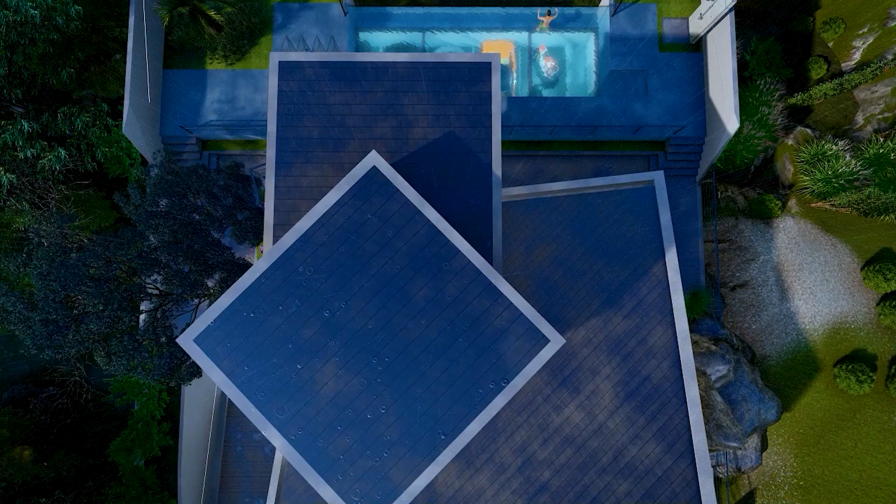Ako nga po pala si Aldrin Ortiz Marin, creative artist at isa po akong licensed architect na nakabase sa Kuwait, at active member ng United Architects of the Philippines Kuwait chapter. Shout out UAPKC at sa lahat ng mga arkitekto sa buong mundo. Mabuhay ang arkitektong Filipino. Let's get started.

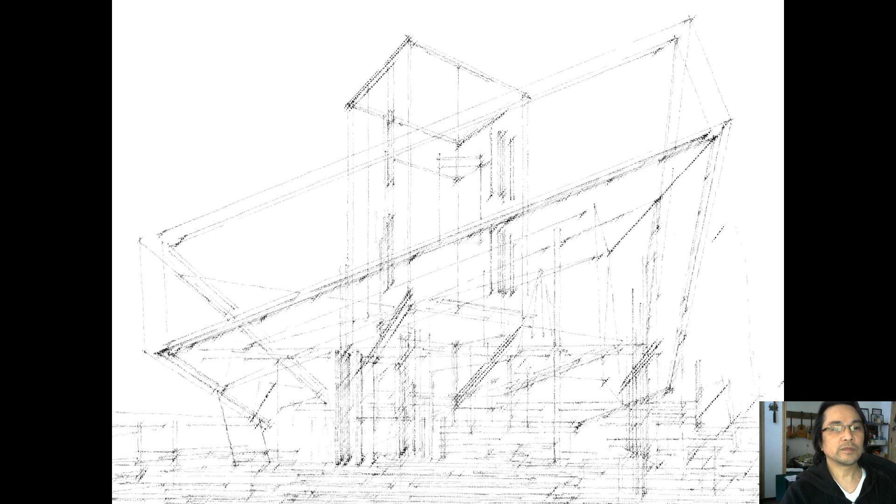Okay, so this presentation is for the design process of a contemporary house with car parking garage intended for the cars that you have seen on the earlier video. However, contemporary is an architectural style which is the upgraded version ng modern design architecture, whereas simplicity is there, but we are introducing an element that is more interesting and more striking.

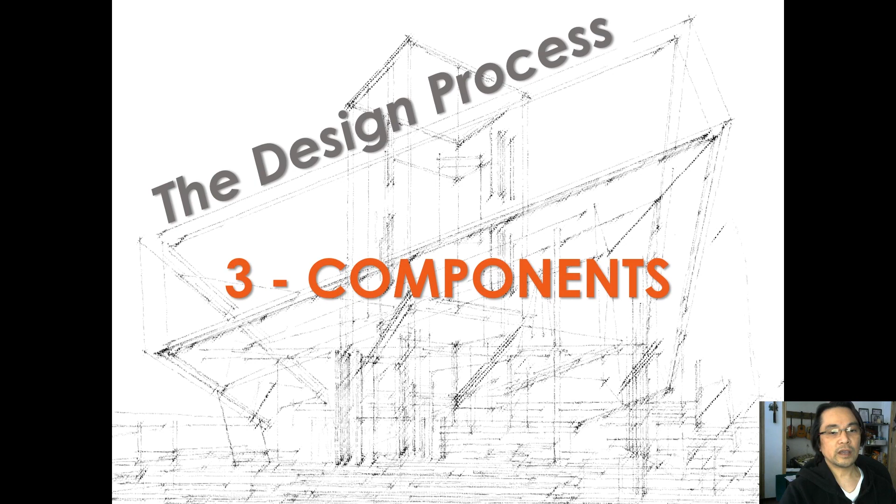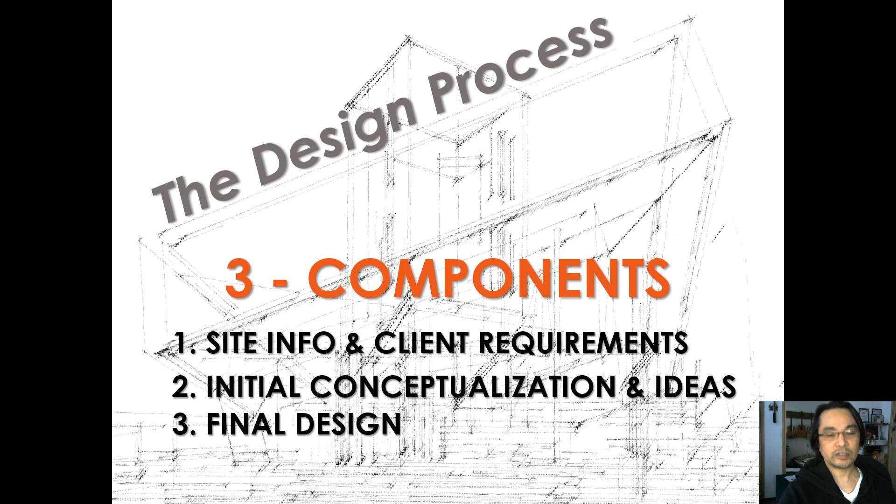So I have chosen 3 essential components to complete the design process. One is the site information and the client requirements. So once the architect gathered all this information, pwede na siyang mag-move on to the next step, which is the initial conceptualization and design ideas. So ang architect ay magpo-produce siya ng mga options, 3 options normally. Then once the client choose the right one, the gusto niyang design, so then the architect will gonna proceed on the final design process. Okay, so let's move on to the site information.

So this is the closer look of our site, and the area is 984 square meters, 24 by 41, and the road level here is 275 meters above sea level. Ang lot natin ay slightly sloping, and then on the upper part is sudden drop. May parang bangin dito. And then on the top side is may malaking bato.

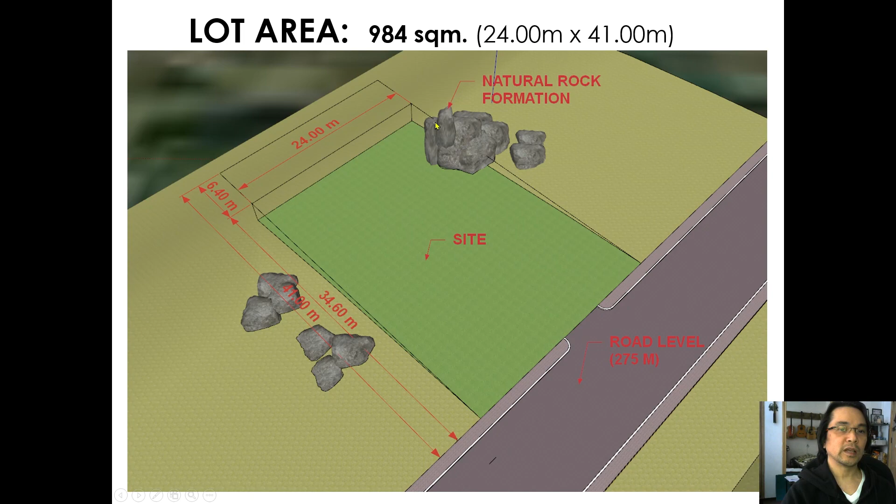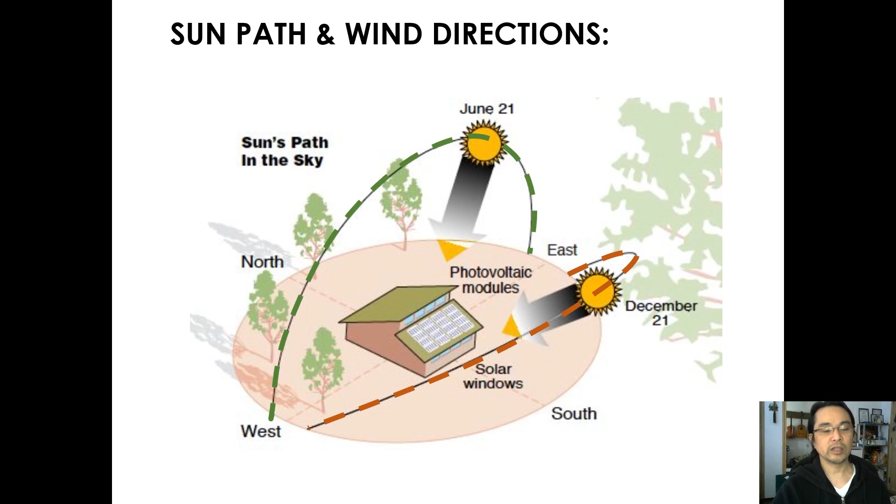Next is sun orientation and wind directions. The image below that has shaded part, ito yung sun angle variation between June to December. This sun path direction studies is really important in considering the sustainable design para ma-orient natin ang building at the same time ma-position natin yung mga rooms sa tamang lugar. Ma-maximize natin ang power ng sun to gain the maximum amount of energy kung gagamit tayo ng solar panels or solar roof tiles. Moving back to the sun path direction, and ito yung orientation ng ating lot.

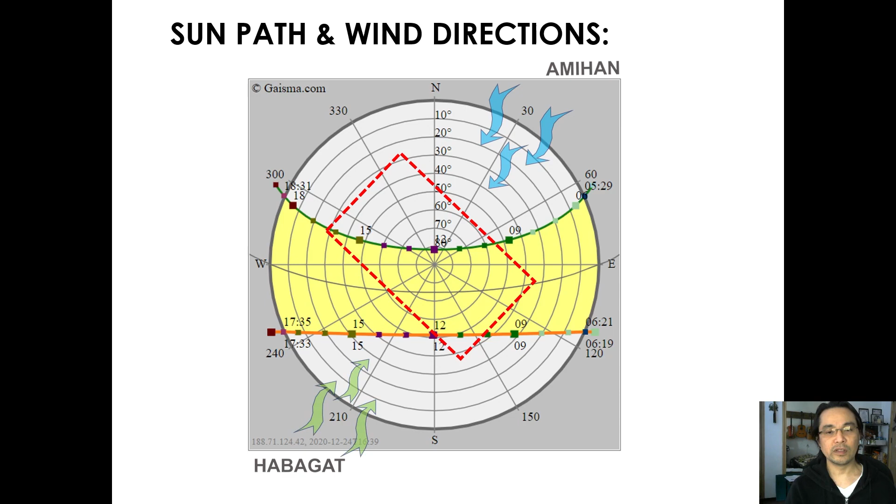Whereas on the top right here is the northeast wind, which is malamig, somewhere around in December. And then on the opposite side is this hanging habagat, which is on June, na medyo mainit at may humidity. Wind directions are really important to consider in the design process for us to have a nice natural ventilation within the building, or what they call cross ventilation.

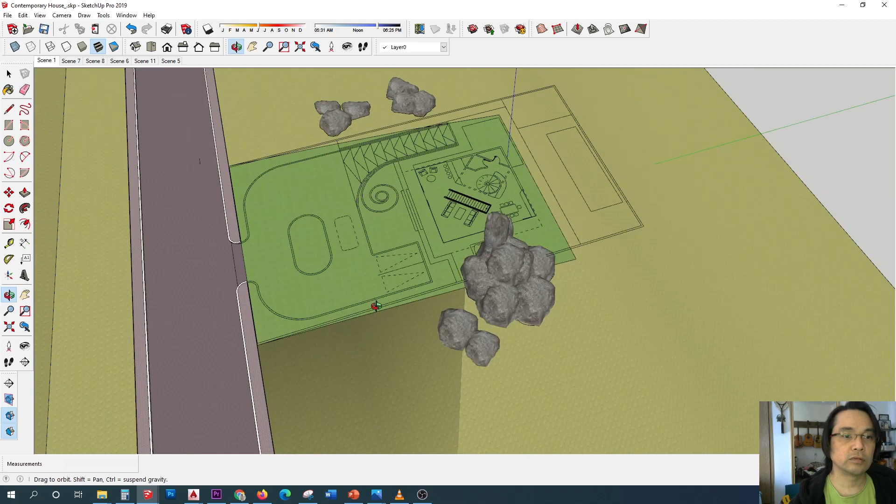SketchUp model. This end part, it is projecting, it's hanging on the air. Cantilever bali to. I'll just fast forward this while I'm doing the SketchUp model here.

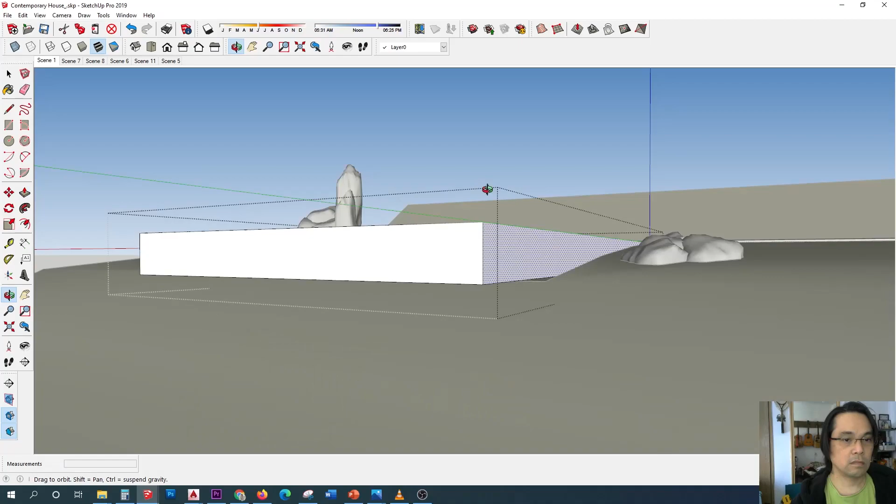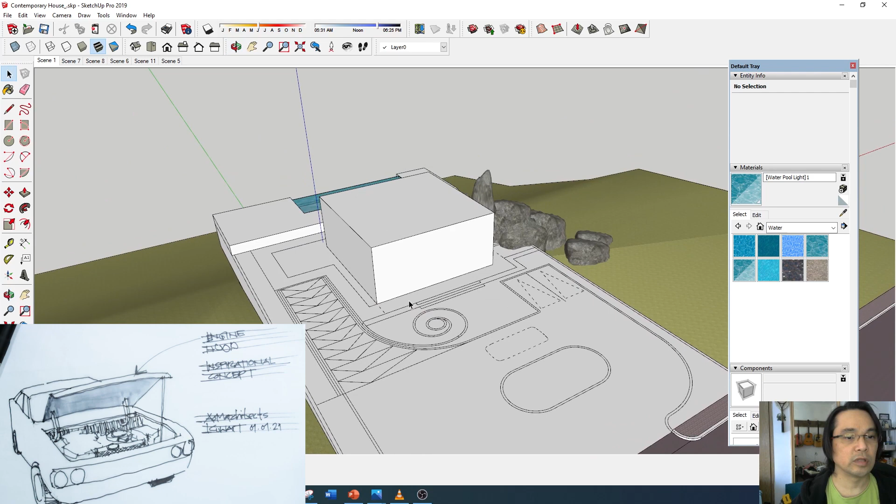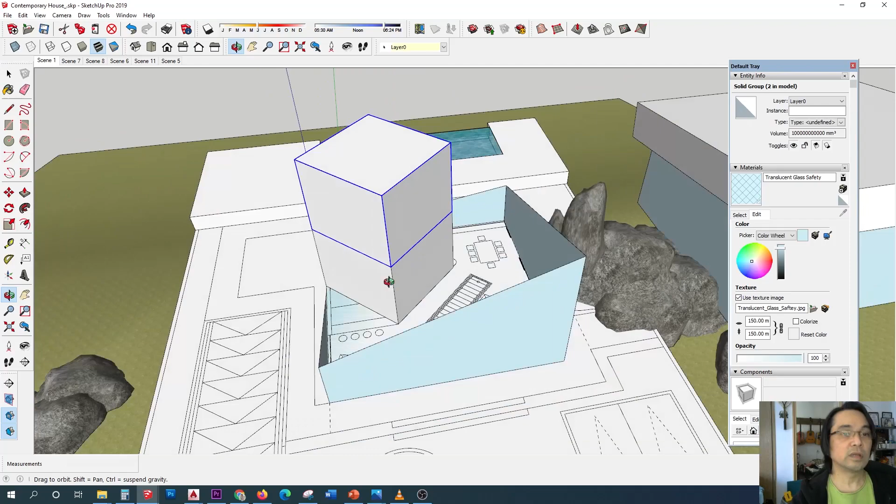So this will be our massing, and we will develop the concept which we have taken on the scale model car. Yung pinaka-roof niya, yun yung concept natin as hood.

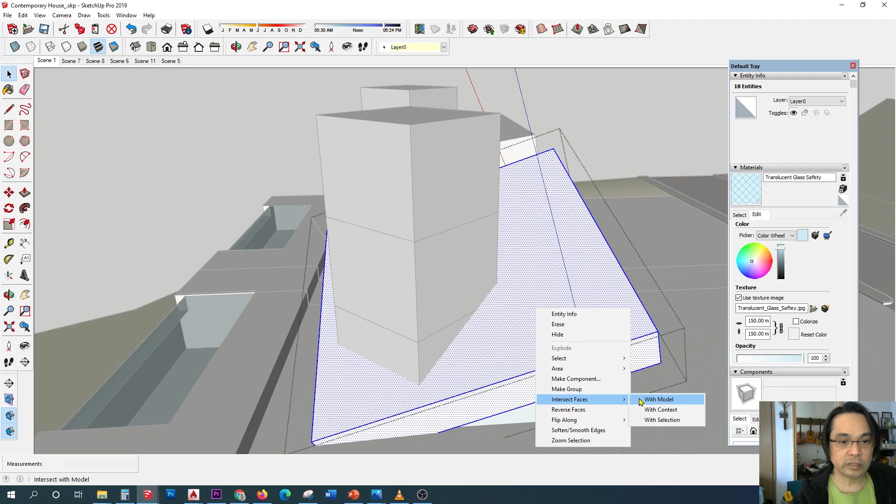So which one is your suggested form? Well, on my side, basically this is the basis of that. And then while progressing, ito na yung naging suggested form natin, which is actually symbolizing the mountain here, and this form represents the rock which is popping out on the surface of the sloping land of the mountain.

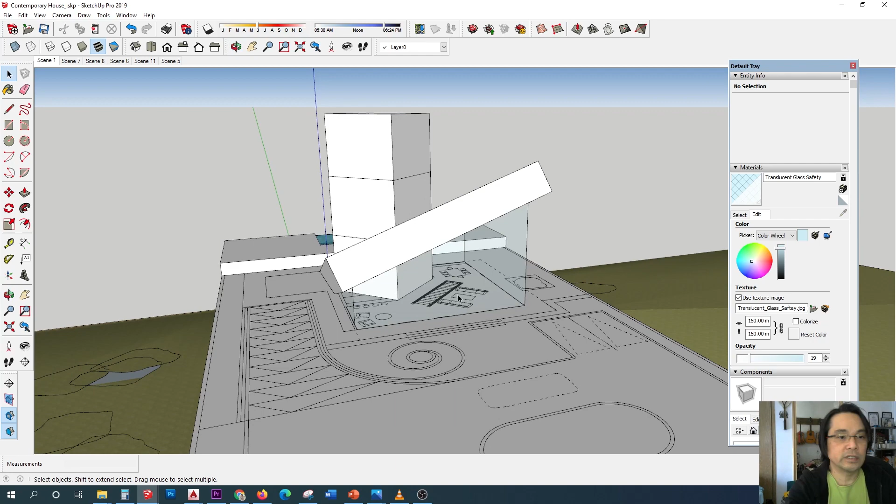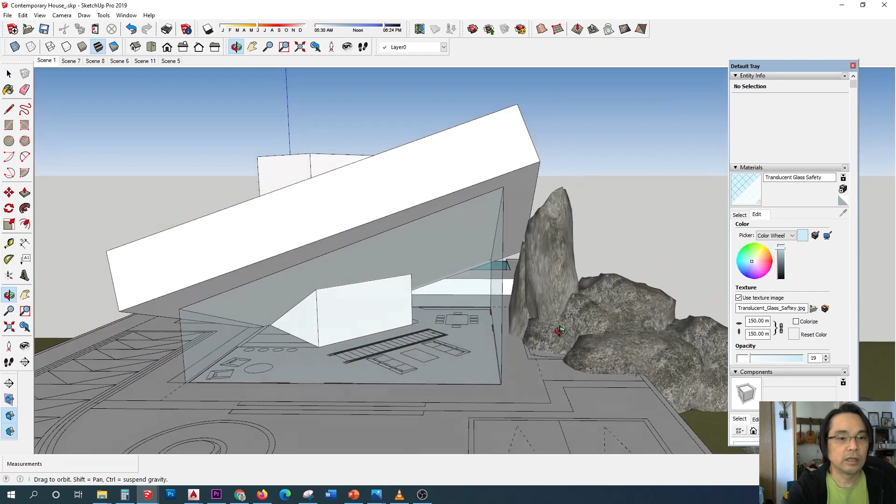So ganon ang way, on my process of doing the design, I actually start with basic geometries, to get the proper arrangement of the spaces, at the same time yung location nila, and then I'm adapting whatever existing elements are available on site to maximize the view over here.

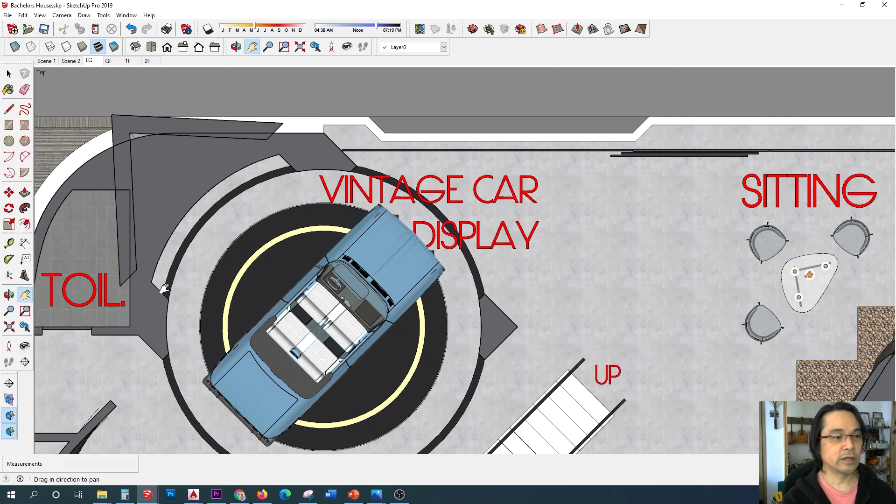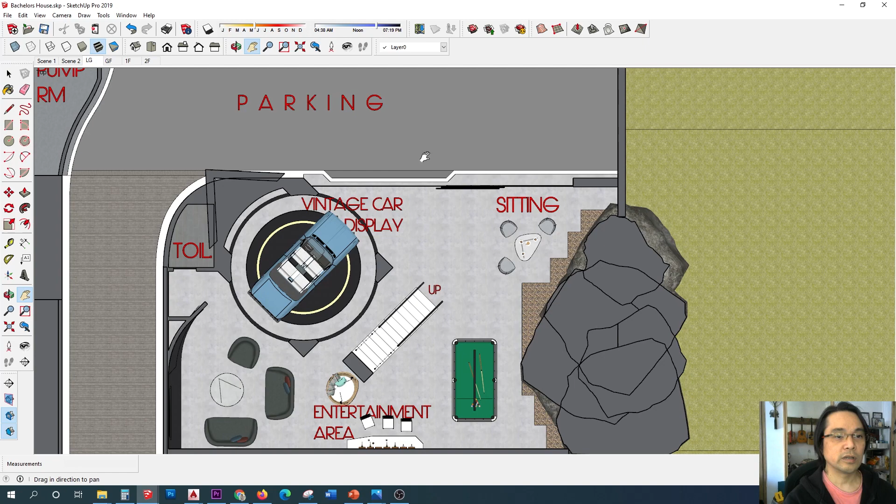Guys, I'm back again for the final design ng ating model. Here it goes. This is the lower ground. Meron tayong ramp which is coming from the ground floor. Then we have this 6 number of car parks. This is the pedestrian entrance, or pwede rin pumasok yung car kasi allotted dito yung wide opening ng door.

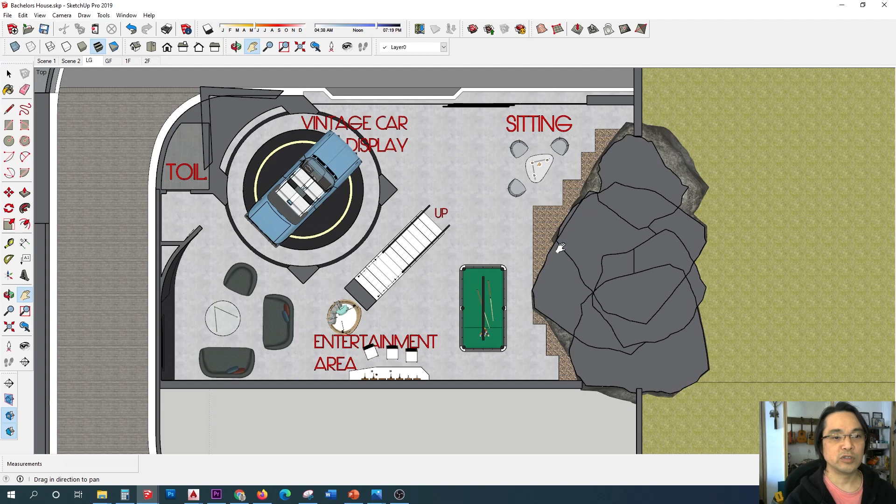As you can see here, yung rock is extended up to the lower part ng lot natin. So basically we did not touch it, respecting the nature as well. So we took advantage on this element, we made it as a feature wall. Makikita natin yan sa perspective. So ginawa natin ng very organic yung design natin.

And then on this plain wall, naglagay ako ng panoramic view ng car racing here para hindi siya maging boring. May feeling na nanonood ka ng car racing. So here is the visual room.

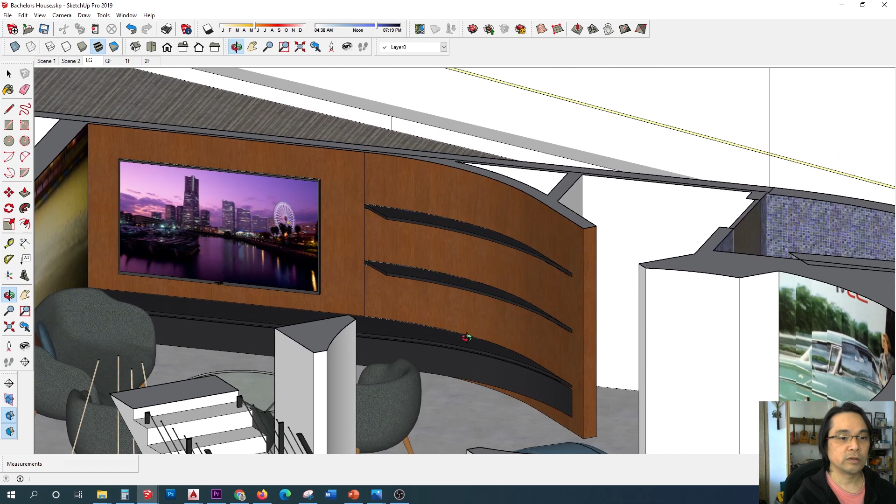Modified this because there's a vacant space here, and I took advantage of that, ginawa ko siyang curvature at nilagyan ko siya ng shelves dito, forming na adapting yung fins ng car, yung parang sa gilid ng car. So inadapt ko rin dito para yung motif ng automotive design ay adapted on our building itself.

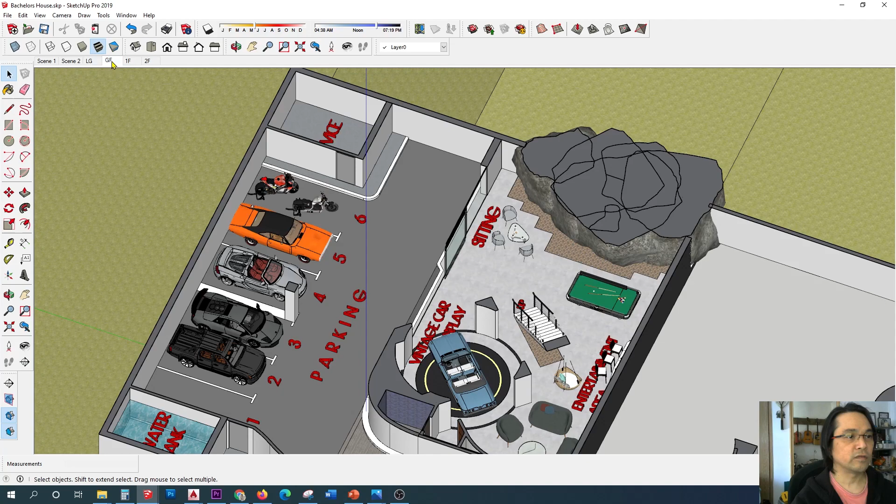Now let's move on to the ground floor. Meron tayong wide open space on the frontage ng building. At the same time, meron tayong dalawang parking space just in case may visitor, so they can just leave out their cars on this area.

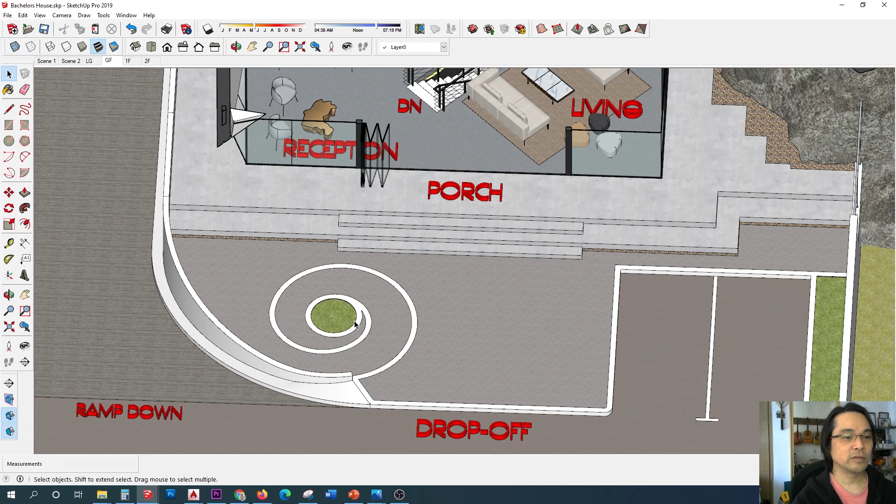After dropping off the passenger, the guy can go here easily anywhere on this place. So upon arriving sa porch, may nasa kanyang option. Andito yung pinaka center ng ating circulation. At the same time, yung consideration natin sa ventilation, yung direction ng hangin ay papasok dito, at the same time lalabas dito yung exhaust niya, so yung cross ventilation natin dito is very effective.

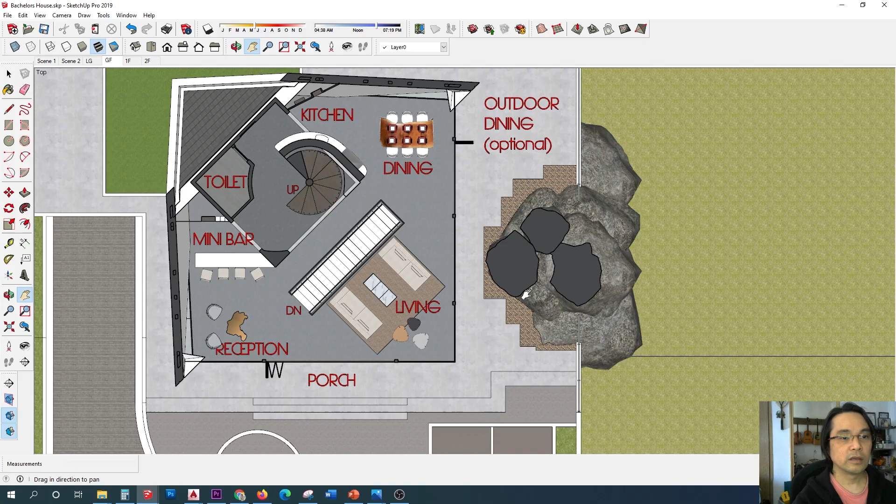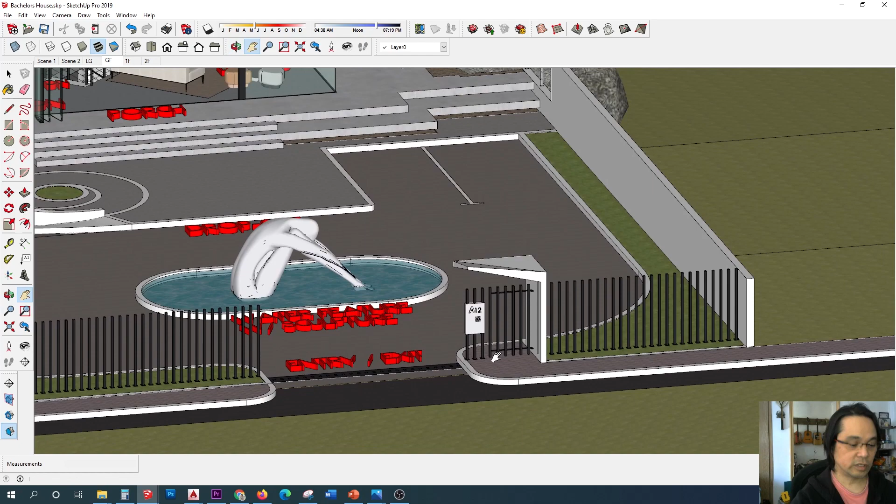Okay, so ganito siya ang itsura. Dito open, and then open here, so nag-circulate ng maayos dito ang hangin. This is the main gate here, at naglagay tayo ng shade, which is adapting the form ng main building.

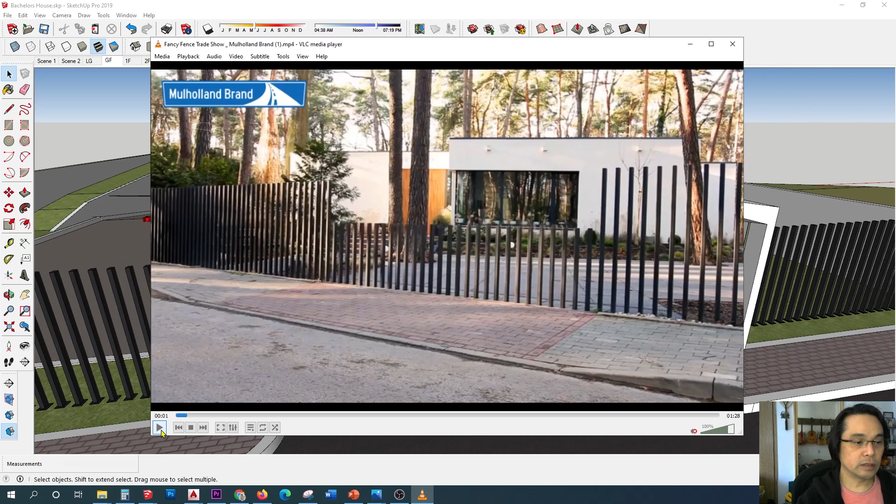So once na you have reached the right spot, you're gonna see these geometries. You might ask why the gate is missing. Ganito yung system na in-apply ko, which I found in the internet, na naka-hide siya. Tesla is also using this. Tesla cars, so this is very effective and very clean gate.

Meron siyang opening sa baba at may mechanical mechanism on below, meron siyang counterweight, at the same time may mga pulley, and there's a machine here.

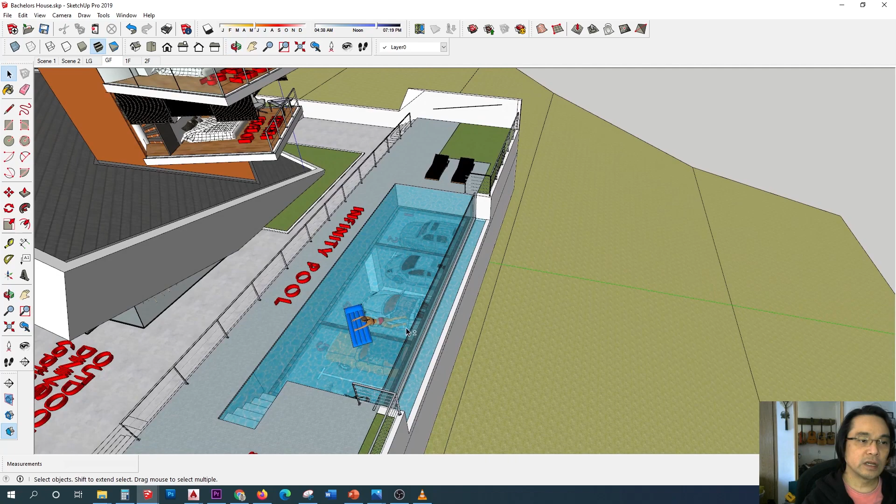Yeah, so that's it. Alright, let's move on to the back side, which is the infinity pool area. So the intention of this pool, why it is bottom glass, is to provide an extra light for the parking below, actually a huge amount of source of light for this area down below.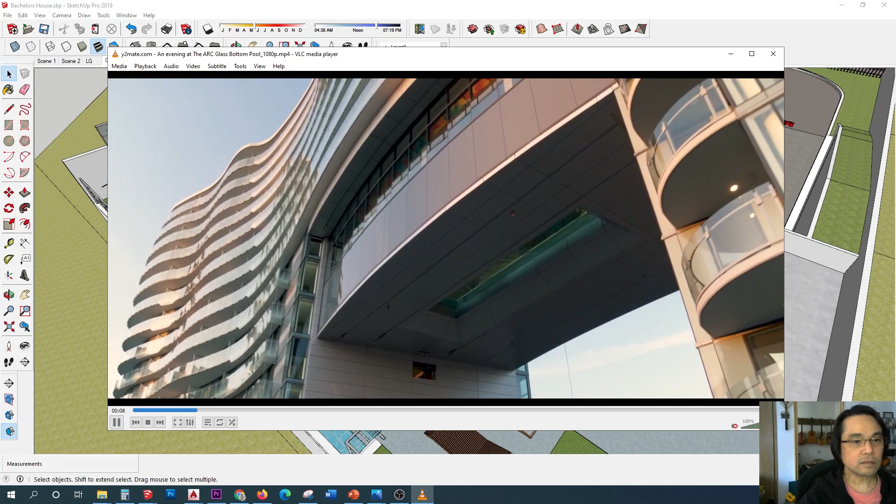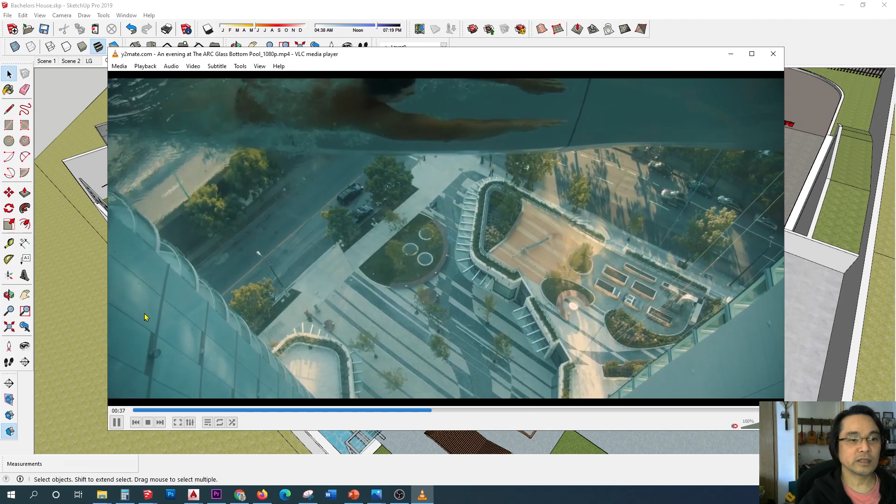And the purpose of that also, parang ganito siya. Ganyan, ginamit nila sa isang tower, isang building, and the effect is exactly the same. So whenever you are swimming, you're gonna see the elements below. The effect is something like this, kung nasa baba ka, makikita mo sila. Kung nasa taas ka naman, within the pool, you're gonna see from pool to below.

Kapag nakatayo ka diyan, you are overlooking the infinity pool. You're going to see it, as well as the view in front of you.

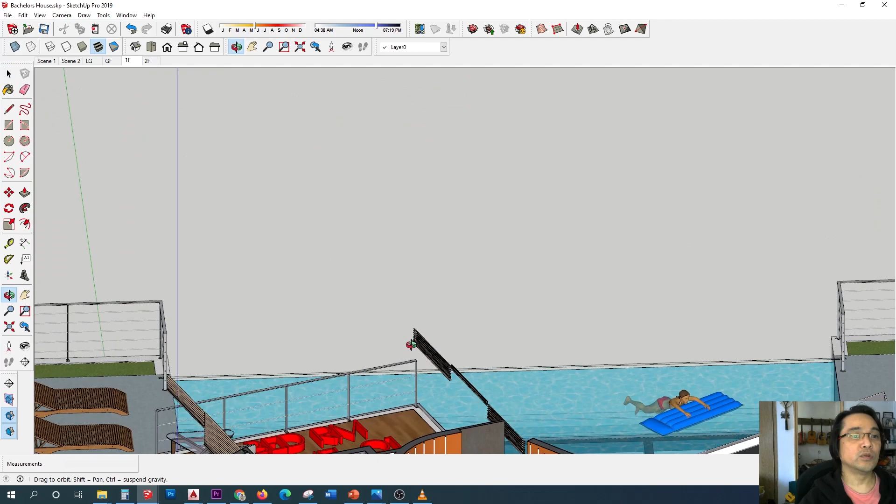Let's talk about the structural support of this leaning roof. During the earlier design, I asked my former colleague in Qatar, who is a structural engineer now based in the Philippines. So tinanong ko siya kung tatayo ba itong roof na ito. What he answered me was a very polite and professional answer, so ganito yung sagot niya.

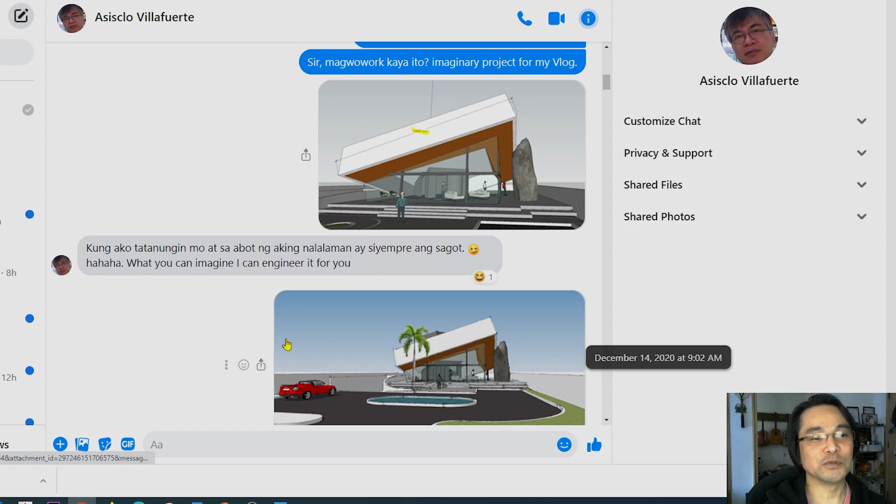Sir, magwo-work kaya ito? Imaginary project ko for my vlog. So he answered, kung ako tatanungin mo, sa abot ng aking nalalaman, syempre ang sagot ko: what you can imagine, I can engineer it for you. Very well said, sir.

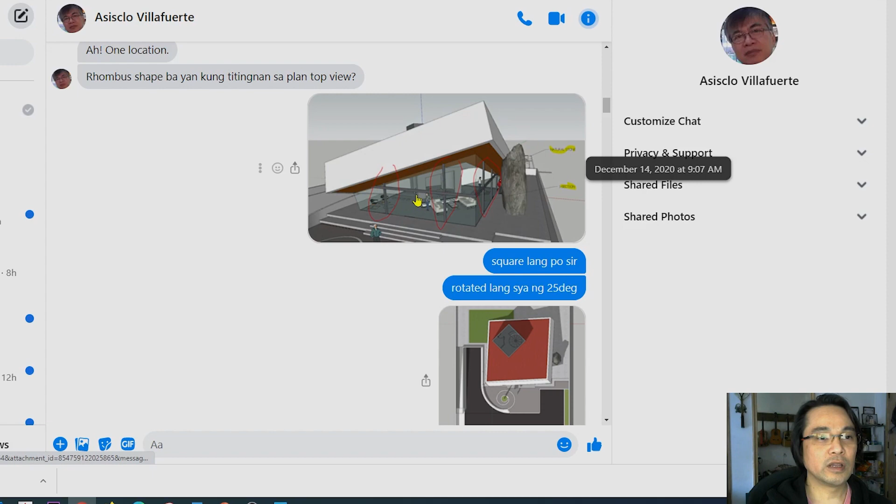Tinanong niya ako kung ano yung mga support niya. As you can see here on the red marks, these are the basic support of the structure. Ang sabi niya is, as long as you have the sufficient rigid member that will carry the other extended members, it is assumed it will be able to support itself and any loads. Parang punong kahoy, parang punong kahoy din.

Sabi nga ni architect Oliver Austria, you have a big brain move. Big shout out to you, sir, Asisclo Villafuerte.

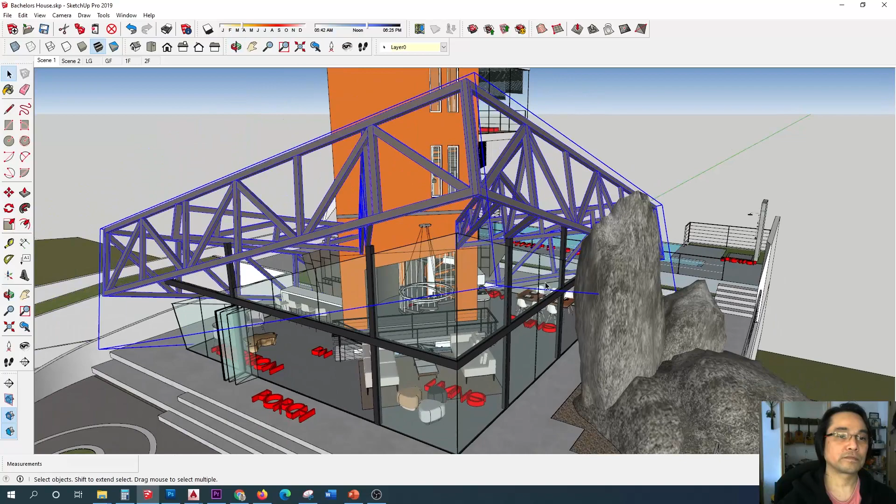During those developments, I already anticipated the framing of this roof, paano siya mag-work. So i-develop ko siya after that discussion. Ganito yung framing niya, yung transfer load niya manggagaling dito, papunta towards the main structure ng concrete, dito siya magta-transfer load. At the same time, susuportahan din ito ng mga box section na pipe na ito. Eventually, during the design development, the structural engineer will decide how much the size of this support required per their calculation. So ganun yung sistema ng ating framing.

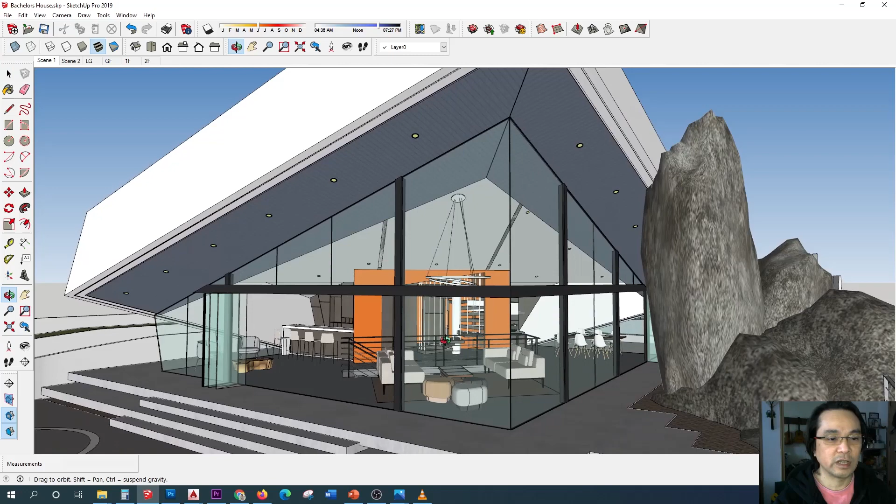Let's move on to the glazing. Ang in-apply kong system dito for the glass, since they are full height glazing from flooring up to the soffit of the roof, we should use a safety glass. Since they are very wide and tall, in case may tumamang bato or malakas na hangin, hindi ganun kadaling mabasag or magsha-shatter. Kasi the system we will use is a laminated glass, something like this — dalawang glazing on both sides, and sandwich yung resin or glue film, tinatawag nilang interlayer. This will reduce the risk of injury.

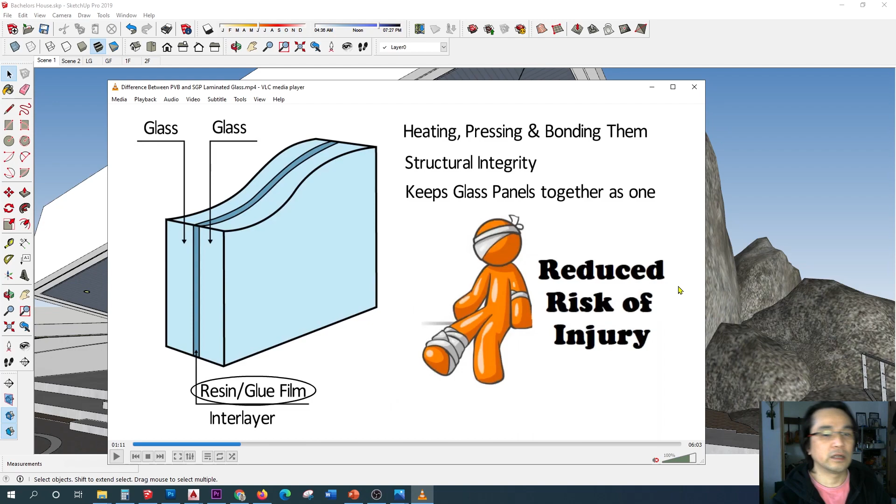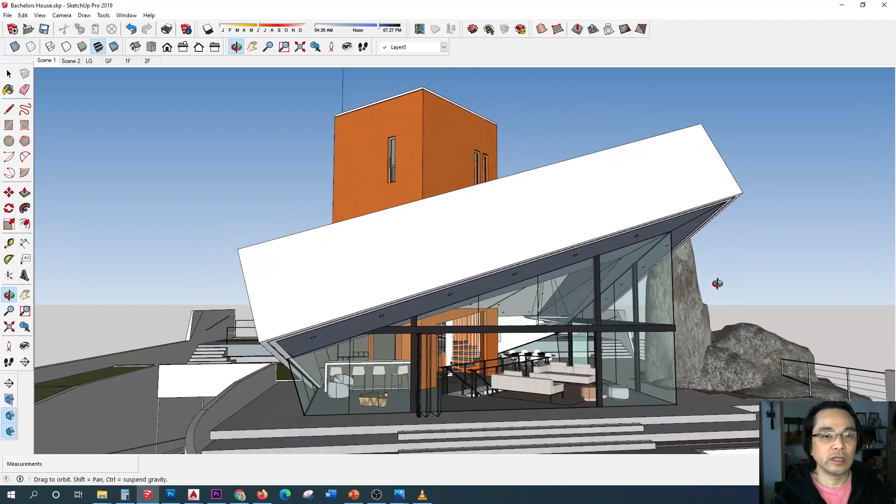For this white band on this leaning roof, we will use a lightweight material to reduce the extra heavy load for this structure. We will use GFRC, which we have used on our recent projects in the office. GFRC stands for glass fiber reinforced concrete, and that's what it's known as in the United States, but the rest of the world calls it GRC. I like GRC better — it's a little shorter, but just happens to be how the names evolved over time.

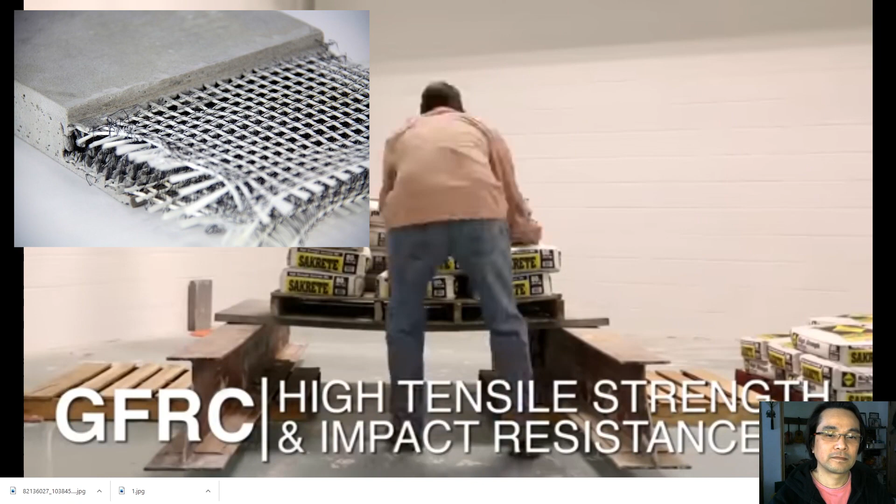Basically it's a Portland cement sand slurry mixed with glass fiber, which has very high tensile strength and impact resistance. Overall it's a very versatile casting system, used for a lot of different applications, from big architectural pieces to small ornamental things. Very versatile in color, very versatile in the different finishes you can achieve.

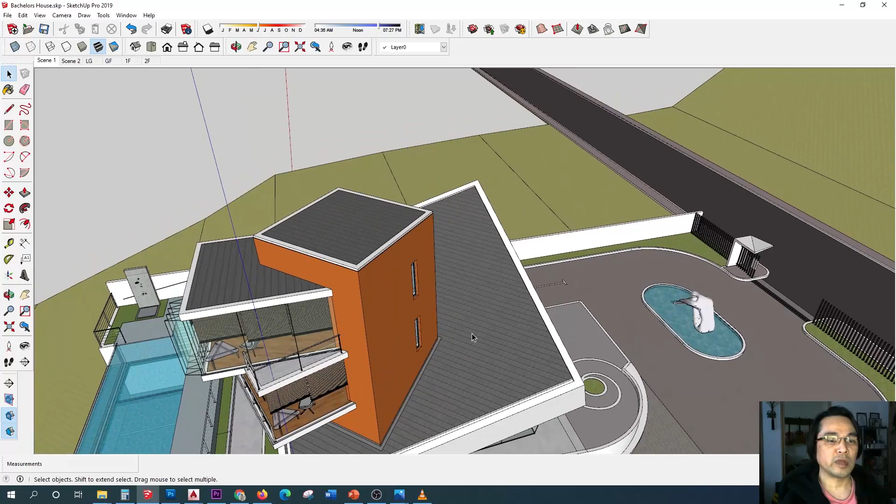How about the roofing finish? The intention of this roof while it is leaning is to direct this surface to the maximum power of the sun, para makagain tayo ng energy coming from the sun. Instead of using the conventional solar panel, I searched for these Tesla roof tiles, which is like a miniaturized solar panel into a small piece like this.

Elon Musk unveiled prototypes of Tesla's solar roof tiles in October 2016. They came in 4 styles that looked just like normal roofing material, but were essentially miniaturized versions of traditional solar panels. So why did we use this color?

It was simply because of this — we adapted these 2 vintage cars that has a unique color, and color contrasting is very nice. What do you think? Unique, right? Very smart move, very big brain move, sabi nga ni Architect Oliver again.

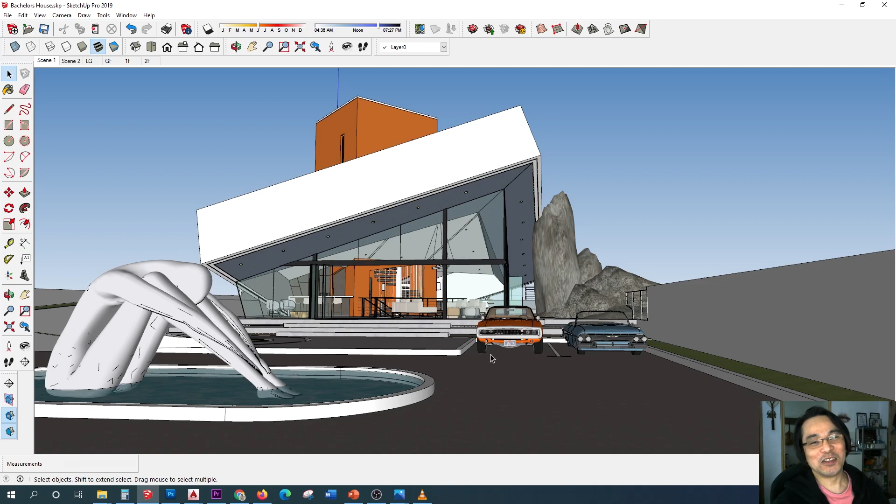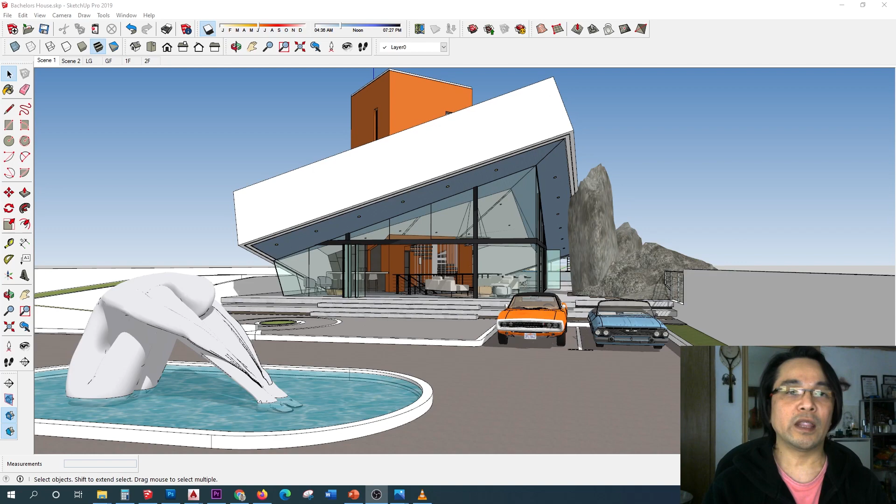And that completes our presentation for this design process on this unique building. Whoever may be interested in this design, please do not hesitate to contact me. I'll provide my information down below on the description, and I hope you have learned a lot on this presentation.